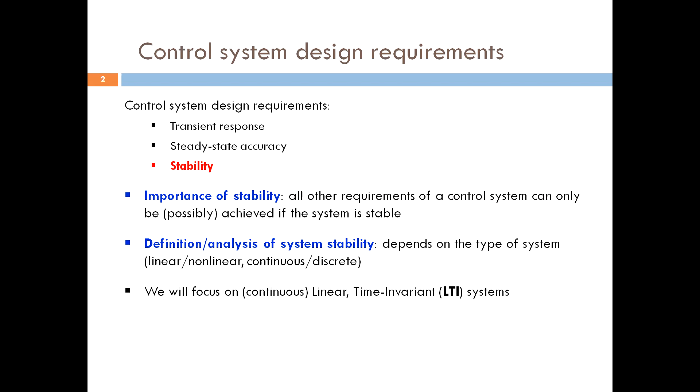One way that we can define the stability of a system is to look at the response of a system. A system response can be thought of as having two components: the natural component as well as the forced component.

One way to define the stability of a system is on the basis of its natural response, that is the natural component of the response of the system. Based on this definition, we say that a linear time-invariant system is stable if the natural response approaches zero as time approaches infinity. It is considered unstable if the natural response grows without bounds as time approaches infinity, and it is marginally stable if the natural response neither decays nor grows but remains constant or oscillates as time approaches infinity.

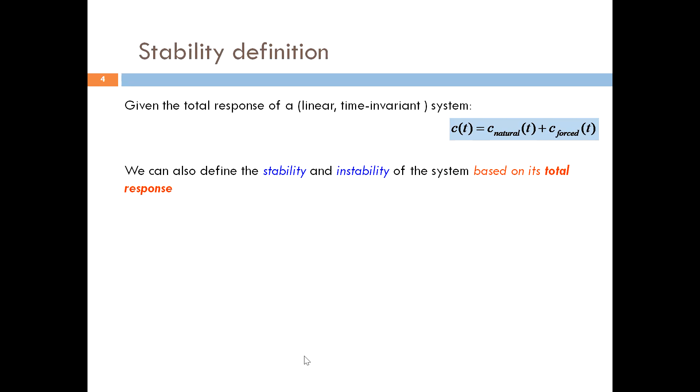So that is one way of characterizing or defining the stability of a control system. We can also define the stability of a control system based on its total response rather than just the natural component. In this case, we can say that the system is stable if every bounded input yields a bounded output. Very often this is referred to as BIBO, that is bounded input and bounded output.

Then it would be unstable if any bounded input yields an unbounded output. So basically the kind of definition we have been looking at is one that looks at the time response of a system. In the case of an unstable system, we find that the time response actually grows continually, or it's got transients that grow without bound. So we find that the system never really reaches a steady state.

So the question that was asked in class is, what is wrong with the instability of the system? The simple answer is that when a system is unstable, we cannot control it. We are not able to actually command the output of the system to follow a certain trajectory. So that is why stability is a very important characteristic of a control system, because if a system is unstable, then it is also uncontrollable.

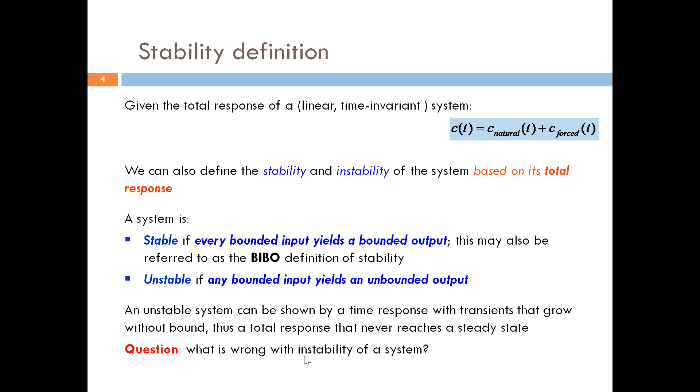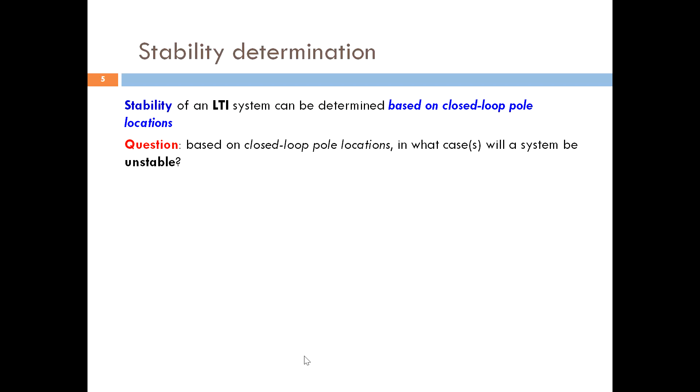As we have seen already in a previous course, the stability of a linear time invariant system can be analyzed based on the location of the closed loop poles. So the question is, in what cases is a system unstable based on the location of the closed loop poles?

Then we've got another example. The block diagram of the system is given again, block diagram on the left, the pole location on the right, and the time response at the bottom. What we notice is that the time response of the system actually has got growing transients. We would expect that as time goes by, these transients are going to continue increasing in magnitude. What we notice about the location of the poles is that we've got some closed loop poles that are on the right half plane of the complex plane. So by this, we see that based on the location of the closed loop poles, the requirement for the stability of the system is for all the closed loop poles to be on the left half plane of the complex plane.

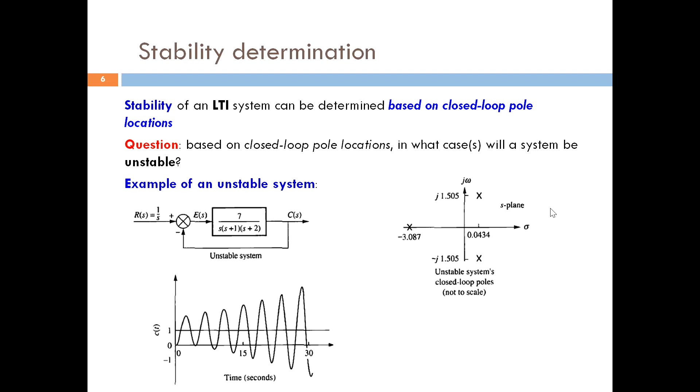Okay, so that is one approach for determining the stability of a control system. We've got a problem presented to us here: how do we determine whether the following system is stable? Obviously, we can consider the location of the closed loop poles. But what do we have to do in that case?

The stability in this case has to be determined based on the location of the closed loop poles. What we have here is the open loop transfer function. So firstly, we would need to determine the closed loop transfer function, and this is the closed loop transfer function. This requires us to work out the roots of this denominator polynomial, which are the poles of the closed loop transfer function.

By this example, we see that it is not always very convenient to determine the stability of a system based on the closed loop pole location, because this requires us to determine the closed loop poles, which may be quite cumbersome in the case of a higher order system.

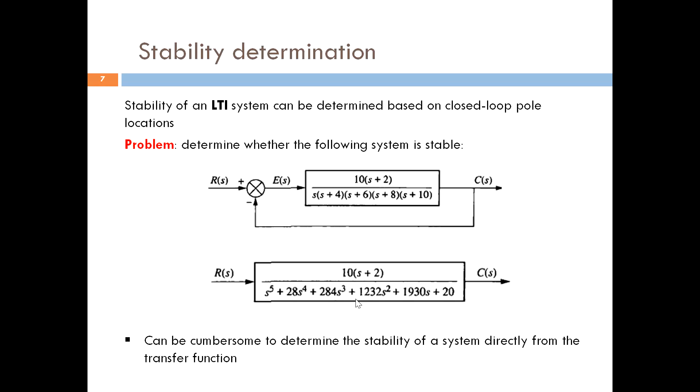So is there another way that we can determine the stability of a system without having to work out the exact pole locations? This is what we are going to look at next.

So there is the Routh-Hurwitz stability criterion, which enables us to determine the stability of a system without having to calculate the exact location of the closed loop poles of the system. The Routh-Hurwitz criterion tells us the distribution of the poles, which means it's going to tell us how many poles are on either side of the imaginary axis of the S-plane, without having to tell us the exact location.

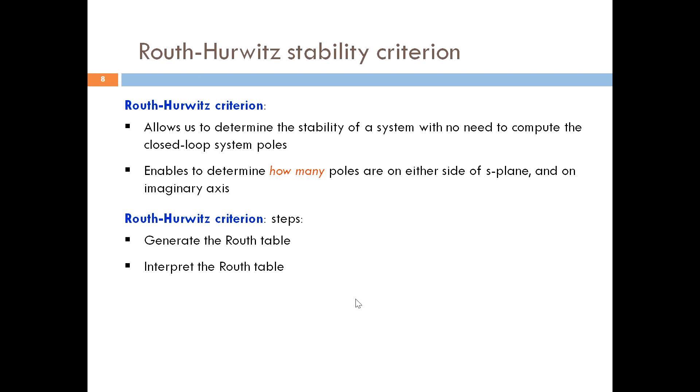Okay, so how do we use the Routh-Hurwitz criterion? The first step is to generate the Routh table and then interpret the Routh table. That is going to tell us whether the system is stable or not. Besides that, the Routh-Hurwitz criterion also enables us to use it as a design technique, as I am going to highlight a bit later.

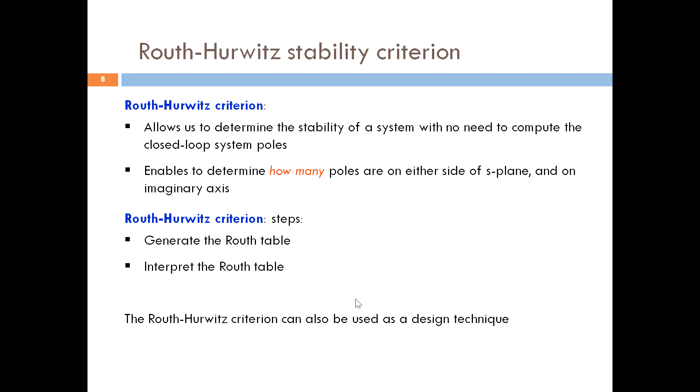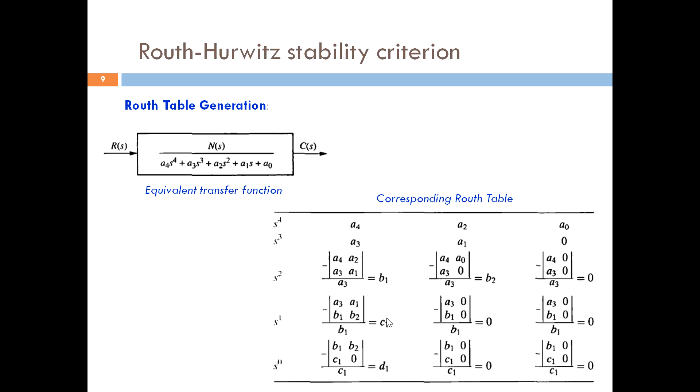And that follows on right up to the last one. So for example, again here, this is the negative of the determinant of the matrix that is made from the previous two rows. So in this case, the first column is A3 and B1, that is in the first column. The second column will be A1 and B2, because that is the column to the right of the element C1 that we are trying to work out. Just as we have covered in class.

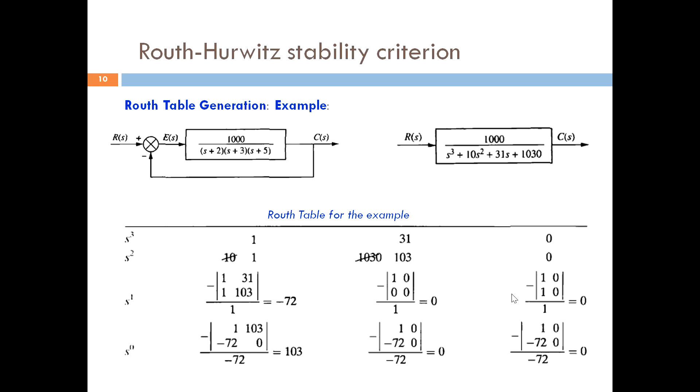So now once we have generated the Routh table, the next step is obviously to interpret it. How do we interpret the Routh table? As I mentioned earlier, the Routh table tells us the distribution of the closed loop poles of the system: how many poles are on the left half, how many are on the imaginary axis if there are any, and how many are on the right half plane.

So the interpretation basically tells us that the number of closed loop poles that are on the right half plane is equal to the number of sign changes in the first column of the Routh table.

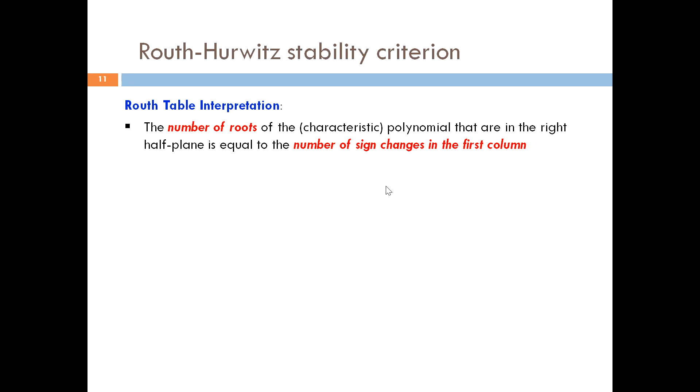This is going to get a bit clearer when we look at the example we were looking at previously. Based on the criterion that we looked at earlier, we saw that the system is stable if there aren't any closed loop poles on the right half. Then that means the system will be stable if we do not have any sign changes in the first column of the Routh table.

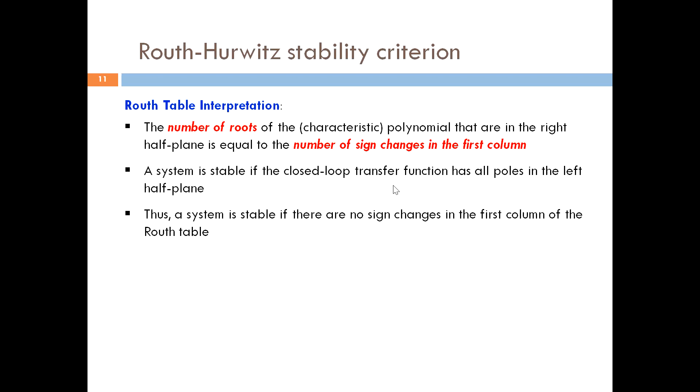So looking at the previous example, you will notice that we only focus on the first column. Having generated the Routh table, we just focus on the first column and look at whether we have any sign changes. We can see here that from the first row to the second row, both values are positive, so we do not have any sign change.

But from the S2 to the S1 row, we see that we move from 1 to negative 72, which means there is a sign change. And moving from the S1 to the S0 row, we go from negative 72 to positive 103, and that is also a sign change. So this tells us that we have two sign changes, from positive to negative and negative again to positive.

So according to the Routh-Hurwitz criterion, because the number of sign changes tells us the number of closed loop poles that are in the right half plane, this system has got two right half plane closed loop poles, which means that the system is actually unstable.

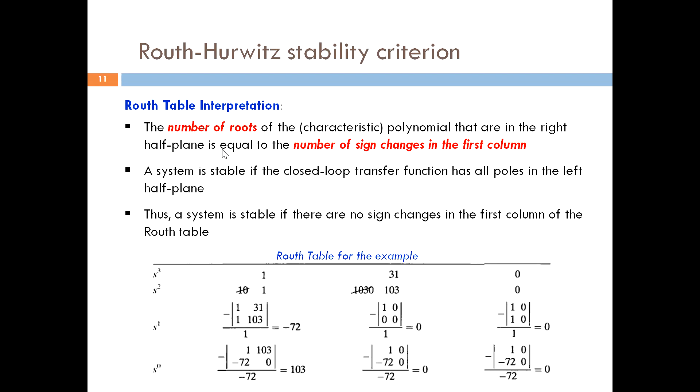So we looked at in class, we did consider two special cases in the generation of the Routh table. We may come across one of two special cases. The first one is that we may have a zero only in the first column of the row. The second case is that we may have zeros in every column, basically an entire row of zeros in the Routh table. Now, obviously, these two cases pose a problem for us, as we are going to look at now.

So the special case one, when we have a 0 only in the first column of a row, having a 0 there is going to give us a problem, because when we are computing the elements in subsequent rows, we need to divide by an element in the first column. This would lead to a case where we need to divide by 0, giving us an undefined value. So what we do to prevent division by 0 is substitute the 0 by epsilon, a very small number approaching 0, which allows us to carry on with the Routh table generation.

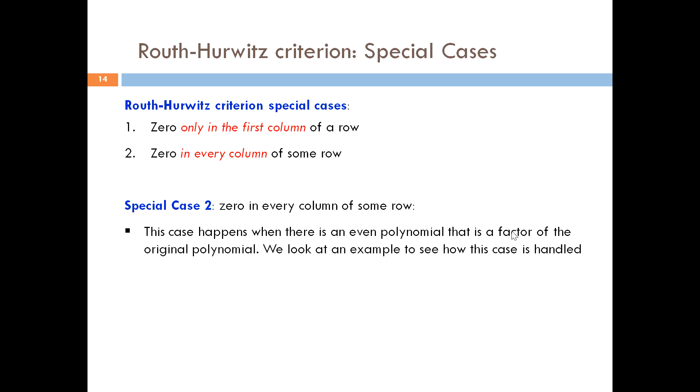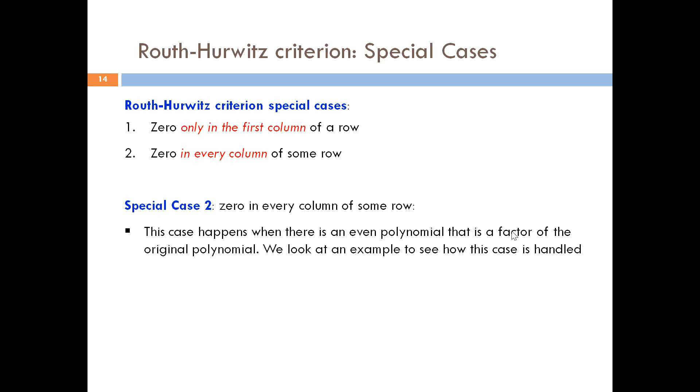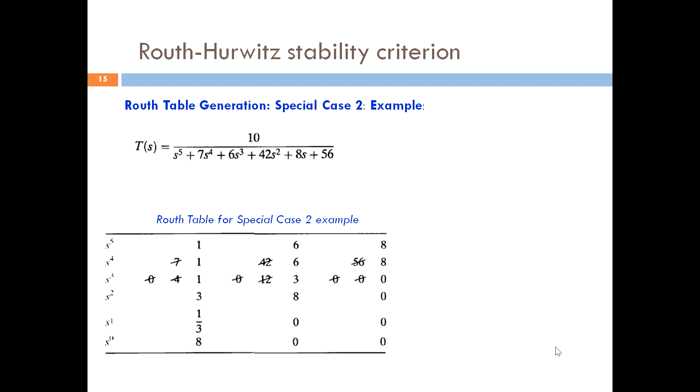The next special case is when we have an entire row of zeros. This requires us, as illustrated in this slide, to determine the auxiliary polynomial. The procedure is we form the auxiliary polynomial using the row just above the entire row of zeros. Then we differentiate the auxiliary polynomial, and the coefficients of the derivative are what we substitute for the elements where we have an entire row of zeros, and then we can complete the Routh table.

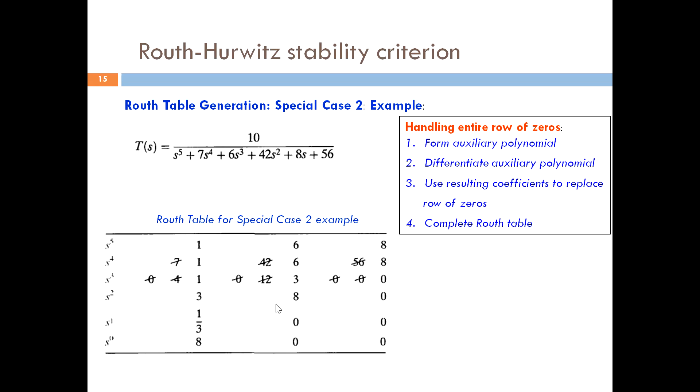So if we end up with no sign changes after doing that, it means the system does not have any right half plane closed loop poles, and therefore the system is stable.

So that's basically the gist of the Routh-Hurwitz stability criterion. As we looked at in class, we are able to determine the pole distribution based on the Routh table, and we looked at an interesting example. We did look into the details of this example. I'm not going to go into it in this presentation, but basically it's something you need to know - to be able to determine the distribution of the closed loop poles of the system based on the Routh-Hurwitz stability criterion, meaning determining how many poles are on the left half plane, how many are on the right half plane, and whether we have any poles on the imaginary axis.

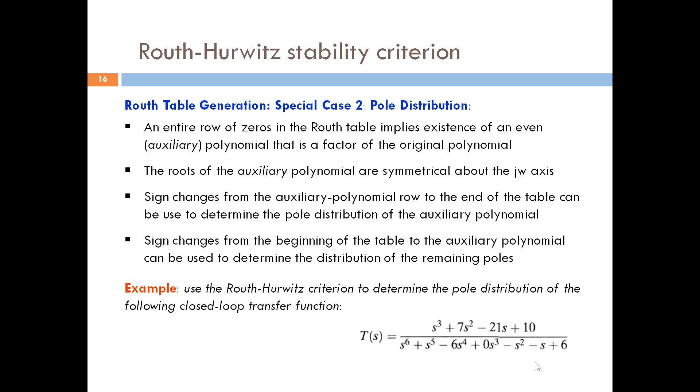Another thing we looked at in class is when we are given a system with an undetermined gain value, we have to use the Routh-Hurwitz criterion to determine the limit on the value of k for the system to remain stable. Again, we did look at this example in detail in class - I'm not going to go into it here, but just to remind you that this is something you should be able to do.

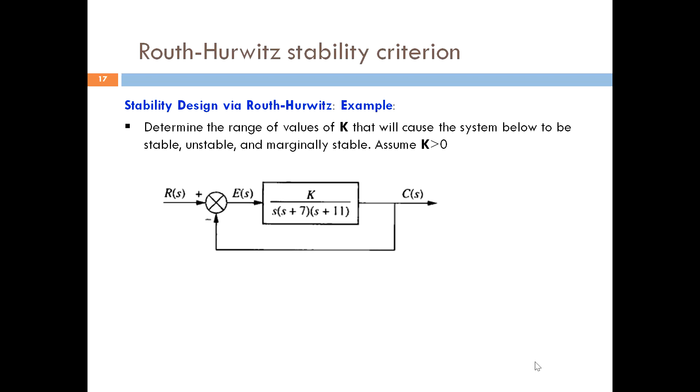So this was basically an overview or recap on what we covered under the topic of stability analysis and determination for linear time invariant systems. In the next presentation, we are going to consider the next topic we covered in class, and that is the topic of steady state error. Thank you very much.